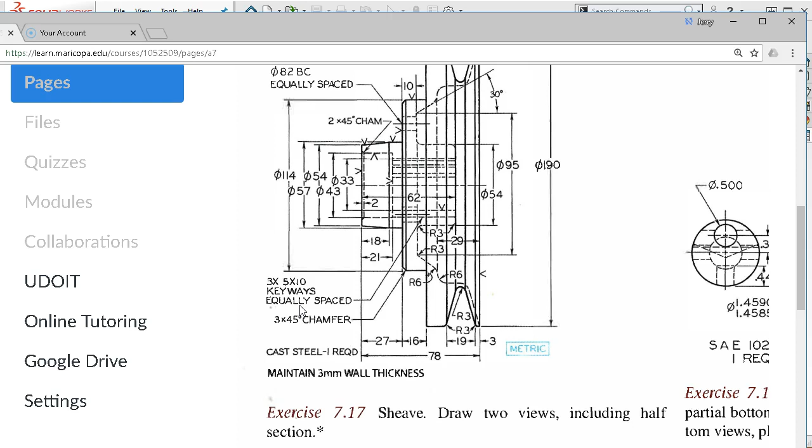So 3 times 5x10 keyways, so 10 by 10 key stock, equally spaced, 10mm holes on an 82 bolt circle, equally spaced with 3 times.

So those don't necessarily have to be clocked. Typically, they don't have to be clocked. In this case, because of the keyways, they may actually have to, may end up having to be clocked because we're getting close to a spline and the positional tolerance. It wouldn't necessarily have to be exact, but if we were putting an 8mm bolt through there, we would have a millimeter either way, so we could look at this from a positional standpoint of do we have to put a tolerance on the keyways to the bolt circle.

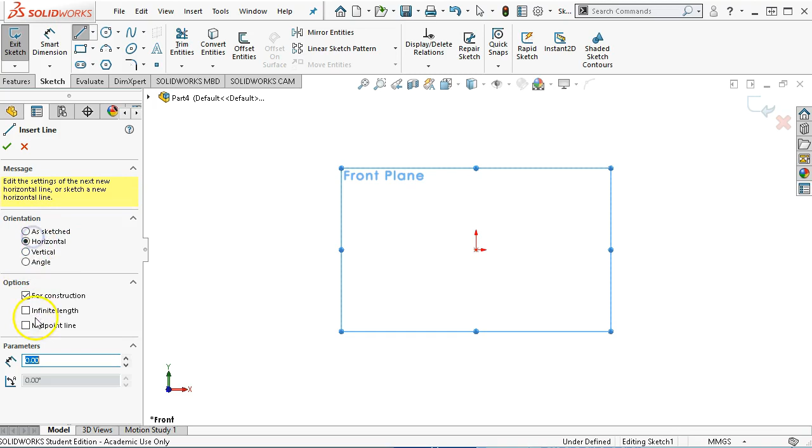All right, so location, let's go ahead and position this out. It is in metric, so new part metric. We're going to go ahead and sketch this in the same orientation on the front plane. So sketch my center line, because this is symmetry or axis of revolution. This is going to be horizontal, infinite length, placing it on the origin.

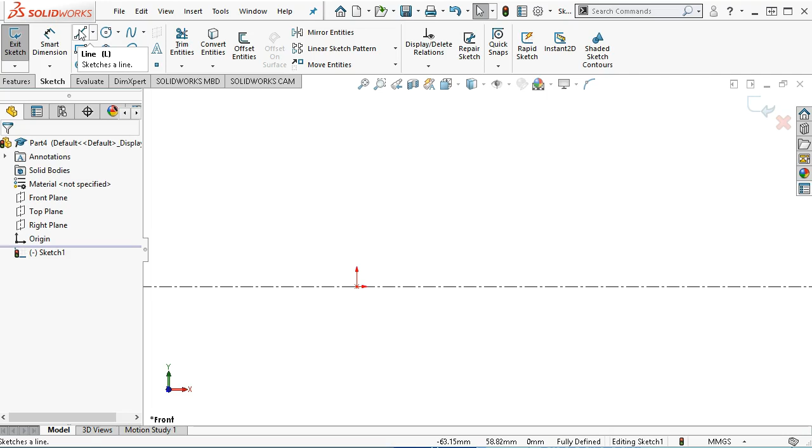The part, the nose of the pulley, the sheave, is going to be on this face. So I guess with the through bores and the lines, yeah, it's not really going to matter. So we will pick the top part, and I'm going to sketch a couple of pieces of geometry to get it started.

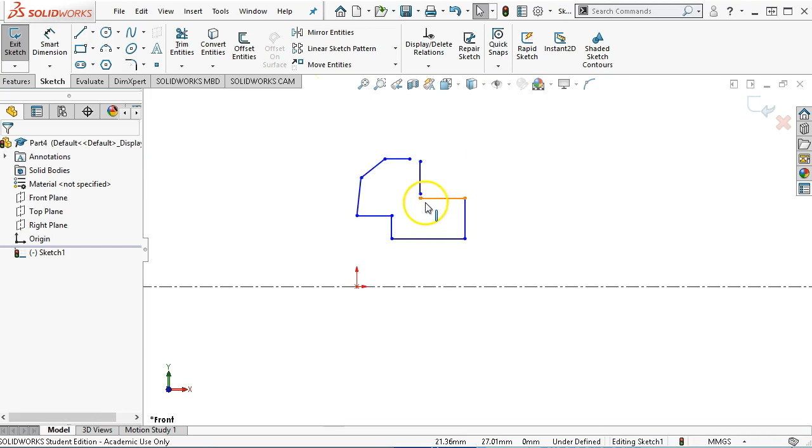And we'll just deal with the hub. So our hub kind of looks like that, maybe not quite like that, but sort of like that, and I missed. So grab the endpoint, drag it to where it's coincident, and that one needs to be vertical. All right, so the end face, that's going to be where I'm going to locate for the origin. So select, control, select, make those coincident.

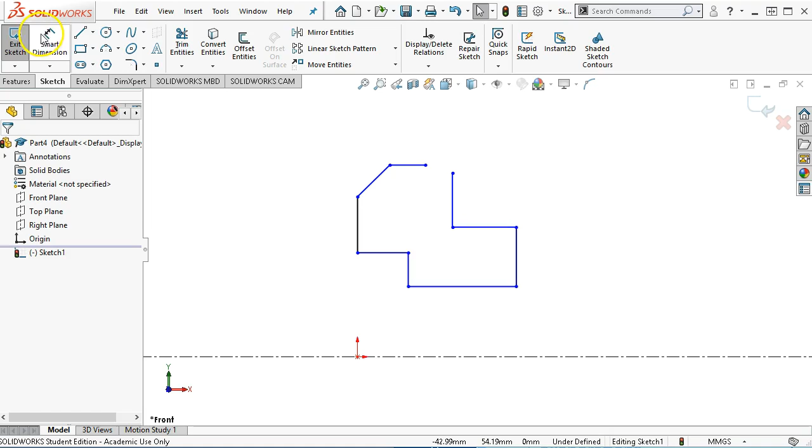And we have a through diameter of 33, so I'm going to get that one out of the way. And once I go into the diameter dimensions, it's going to stay, so 33 and 43. And then the outside of the hub is 54.

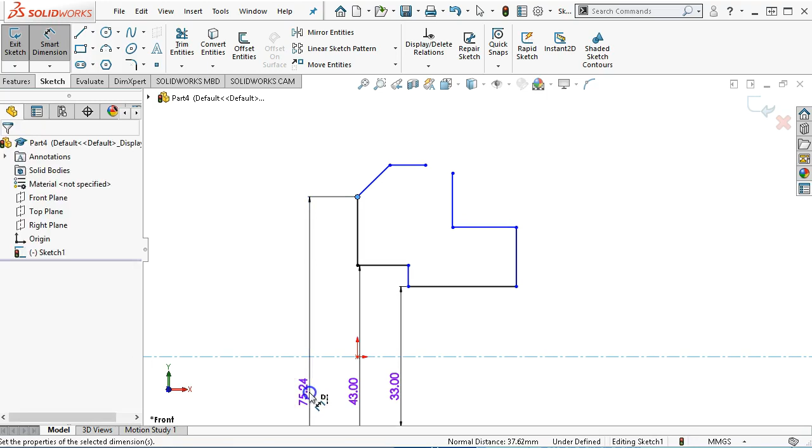All right, I need to expand that out, maybe not that much. Expand that out to where we can see that then it goes from 54 to 57, and that's determining the angle. This is called a cast steel. One thing I noticed is that they put the grind marks on, so this is sitting inside of whatever is turning. They want a nice surface finish on those, but we're not given a surface finish call out, so I'm not going to worry about those right now.

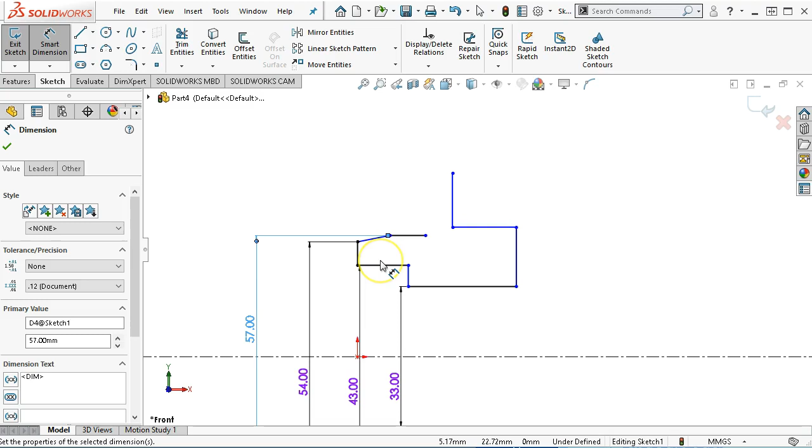So we go back into the diameter, and once I'm in that diameter command, and you see the little D center line, it's going to stay until diameter until I hit escape. All right, so after I pick the first one, place it on the opposite side of the center line, that puts me into the diameter dimensioning or the full dimensioning. Then I can hit escape to get out of it, and we'll start putting in dimensions. So the step is 21. The angle is 18.

See what else we have to work with here. We're not quite past the step. The overall from nose to the back is 62. And then those inside diameters, we're going to go to 54, so we're now in the diameter tool.

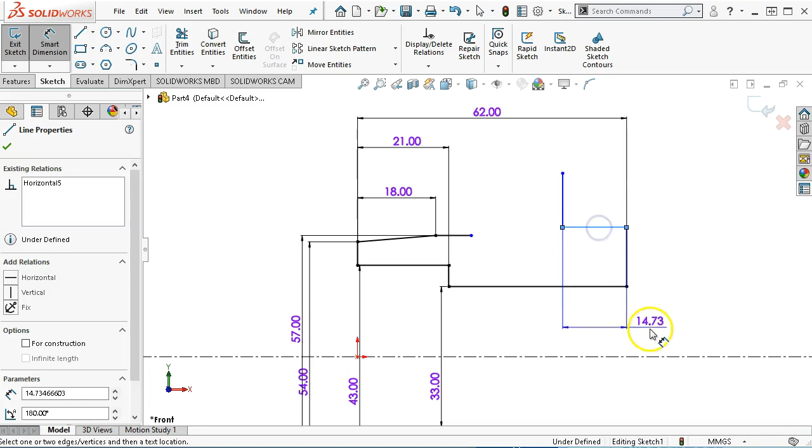So we're going to have to pick the center line again, and then we'll go 54. And from that face then, all right, so we have the 54, but from the back edge to the inside is 29, and we set the 62.

So we're looking for kind of a stack up since this is in effect chain dimensions. So we're going to go over, out. Let's see, there's only the one chamfer, the rest are radiuses. Okay, 2 chamfers, and that one's a 3 millimeter, and then the 2x45.

So where is the second 2 millimeter chamfer in this? I would think it would be on the back side, but maybe not. Okay, so sorry, not 2 times, that is a 2 millimeter by 45 degree chamfer, 3 millimeter by 45 degree chamfer. Okay, that makes sense.

All right, so 62 to that face. We're going to go back up and around. And what is that first step?

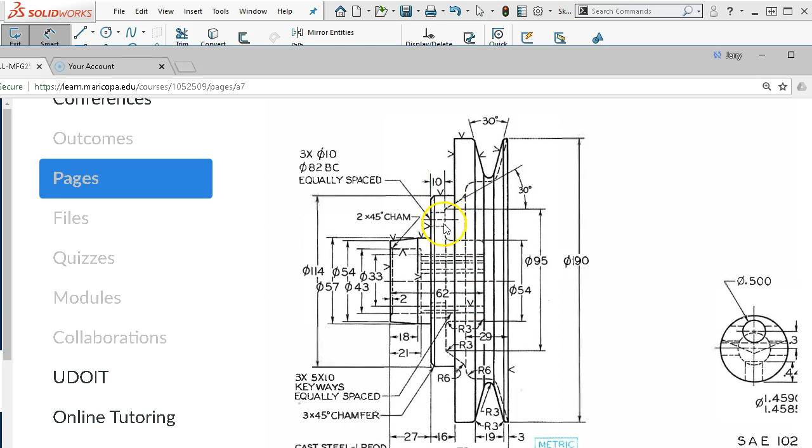And it comes back. Where is my dimension to that step? So we have 19 there. I don't think we're, no. Oh, there it is, 10 millimeters from there back. All right, so it took a little searching to decipher that.

All right, so let's do the next couple of segments. So we'll pull that up a little ways. That's probably not too far off, I think.

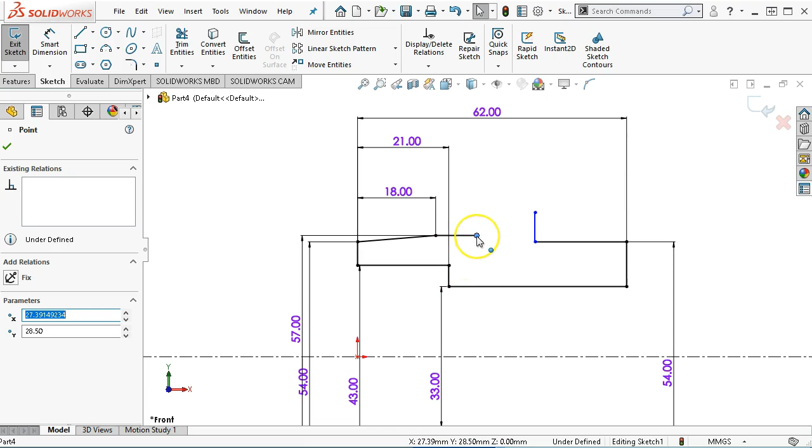Okay, the 21 was the inside step, and the 27. So, all right, so this comes over.

Up, and then it's the outside step. All right, so once we get over here and it comes back down, and this one is at a little bit of an angle and goes this way. All right, so,

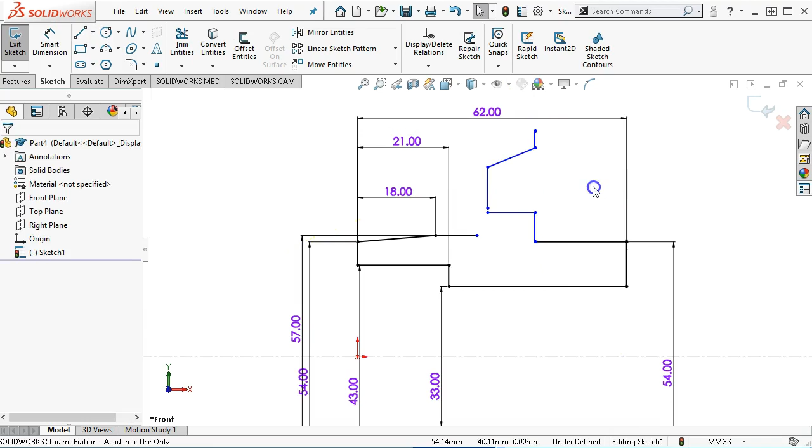And I missed again. So there we go. And then we'll follow it around this way with, oops, missed.

All right, let me get out of that. And whoops, sketch. I was trying to do a thin feature. Got really button happy on that one.

Back into control 1 to the front view. I'll pull that out a little ways. I'm going to go ahead and draw the feature in, or the fillet in, and then we'll call that good for now. All right, so I have enough geometry.

Horizontal. No, oh, it went parallel. All right, so when it gives me the error and I see the parallel, it actually inferred for that line. So that was not the desired result.

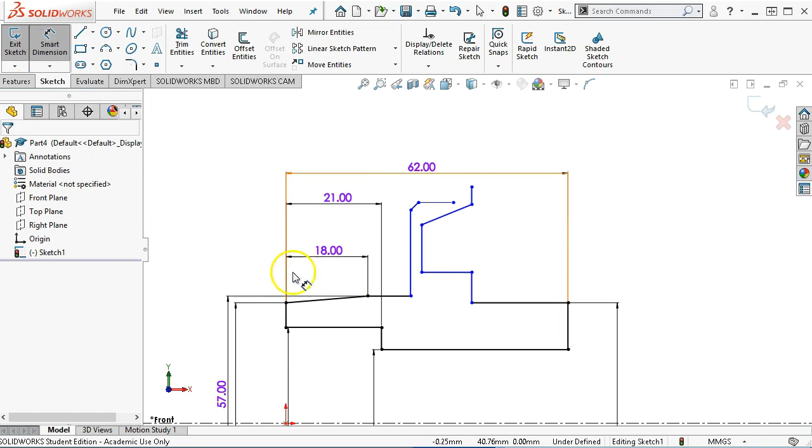All right, so 27 millimeters to the first step, and then 16 millimeters to the next. And I probably could have put that on the next line.

Oh, I got that to go to a center line. So let's uncheck the for construction. So that means these guys are going to come back a little ways.

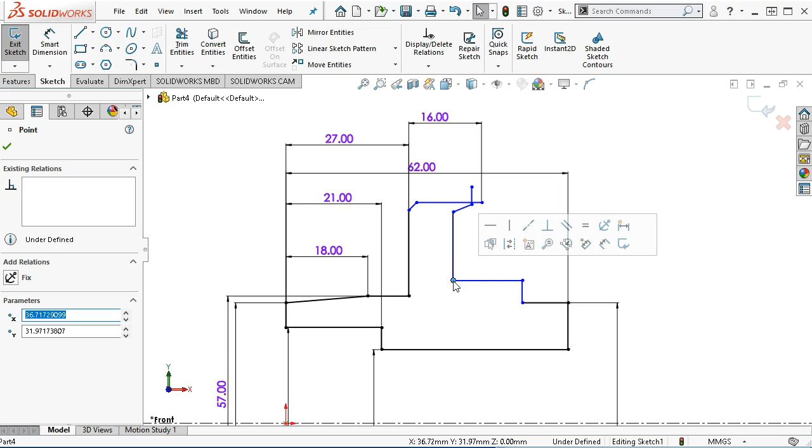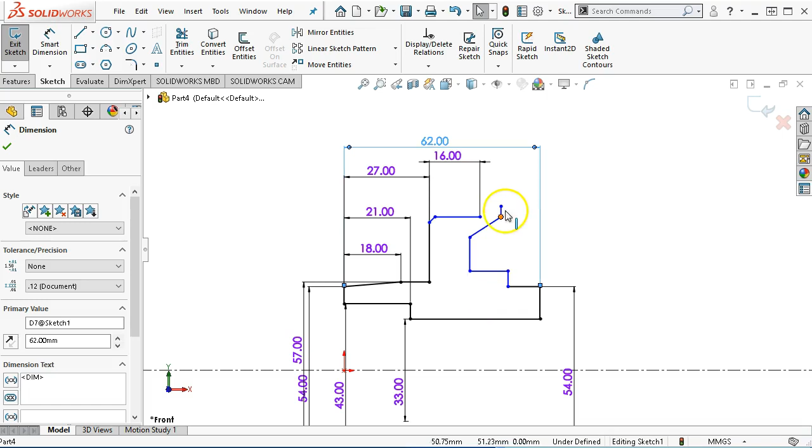All right, so the 29 is to this step. And the overall, well, we haven't quite worked our way around to the overall. All right, so we're going to need that overall.

So we have the blend, and then it goes into a radius, and then it comes back and it goes into the angle, and then it goes that way.

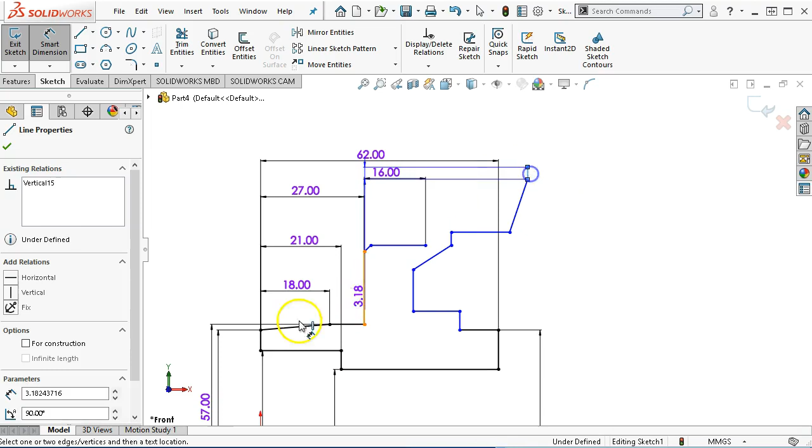Ay, ay, ay. All right, so from that point to that point is 72, or sorry, 78. And then from step to the line is the 29.

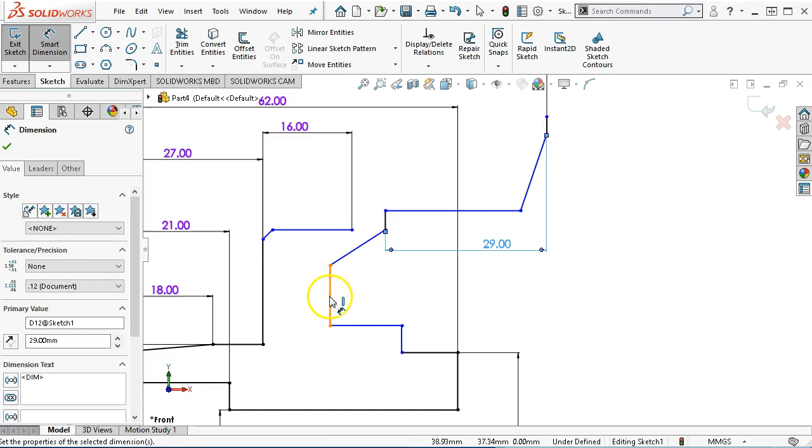And then this one is the 10. Okay, so kind of expecting that to be a little strange.

All right, so to our points, as we're still deciphering this thing, we're 190 on the outside. And since that goes right into a fillet, I'm going to go ahead with the point. 190, so that's quite a bit bigger.

What else am I missing for the diameters? So the outside hub on that 16 millimeter is 114.

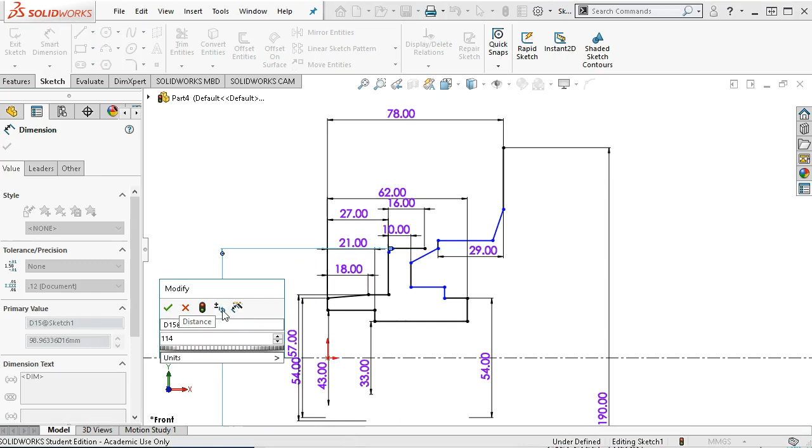I'll kind of leave that one where we can get to it. 114, and we'll come back. So this was 3 millimeters by 45.

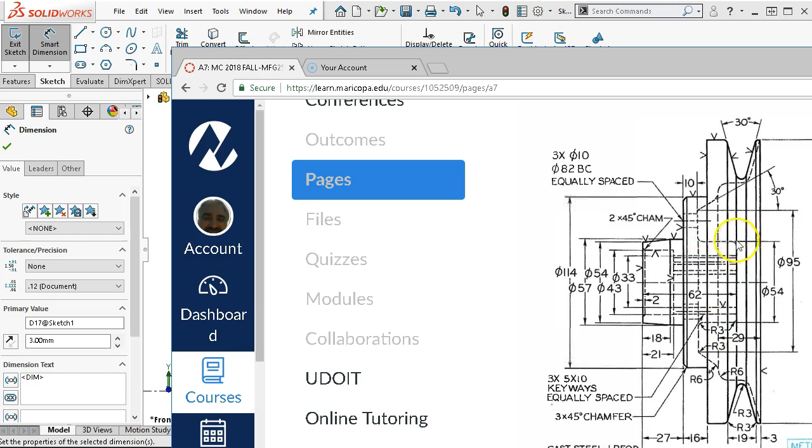Okay, so those are starting to come in. Let's see, what else do we have? The hub, we did at 54. And so let's double check that I did that correctly, because I think I got another step in there.

All right, so deciphering it that way, I was thinking that that step was part of this, but since it's not, we'll delete that segment, and that comes up, and that goes coincident. So that makes the interior hub.

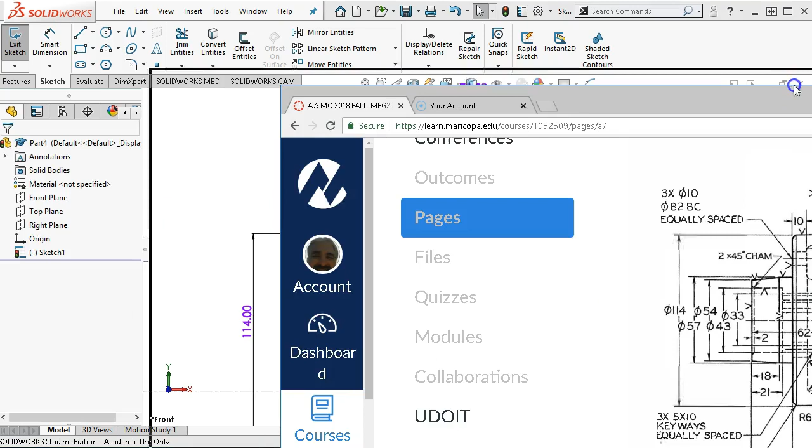Okay, so coming around and over a little bit of an angle on the step. Oh, too much.

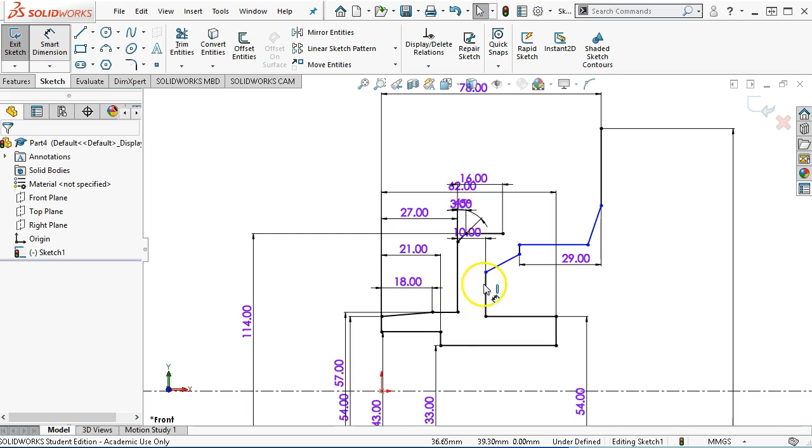All right, so to the point, to that intersection was 95, and I'm not going to worry about any more of the fillets because, well, this just became complicated enough.

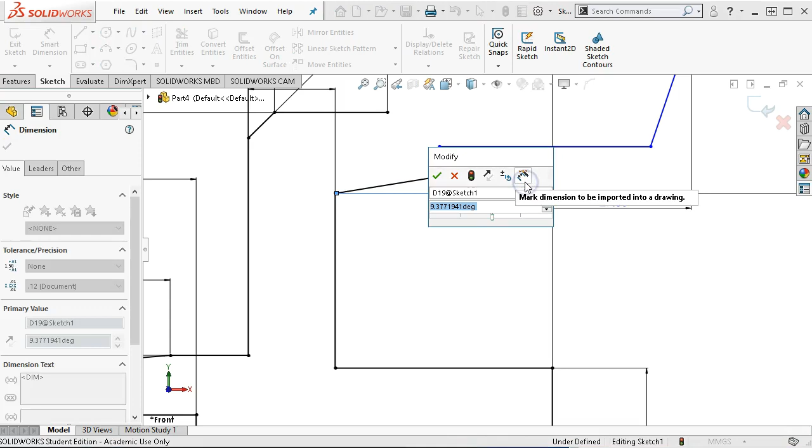The fillets and rounds. We have a 30-degree angle, so here's where we can go the endpoint and the line, and pick the four-headed arrow that goes in that direction, set the 30 degrees.

All right, and then the next step, if that maintains the 3 millimeter wall, then we're going to have to construct the V to get it into position and come up with that angle.

So since that's at 30 degrees, then technically that should be at 30 degrees. And now you know why there are only 3 exercises in this assignment.

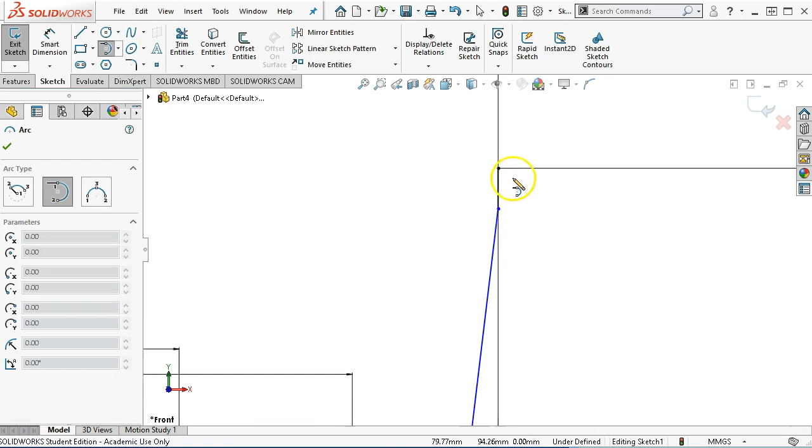So let's go to the tangent arc, and we'll come off of that way. And then we'll select out of it. I'm going to hit L on the keyboard.

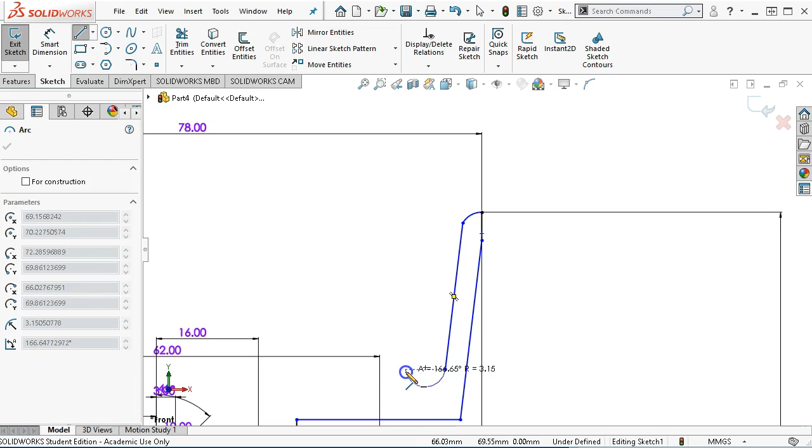And we're going to look for parallel. So I kind of hover over that and it flashes up the parallel. We'll go into a continuous, to the continuous tangent arc and pick up that point.

And that should not be vertical. So that means I'm losing the tangency a little bit. But while I'm here, I'll go ahead and select.

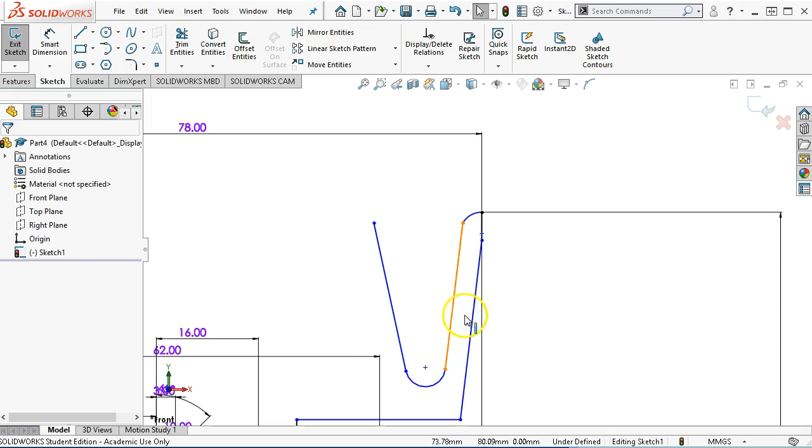All right, and these are going to be symmetrical on the lines. So let's go ahead and put in a 30 degrees. So actually the 30 degree half angle would be 15 degrees.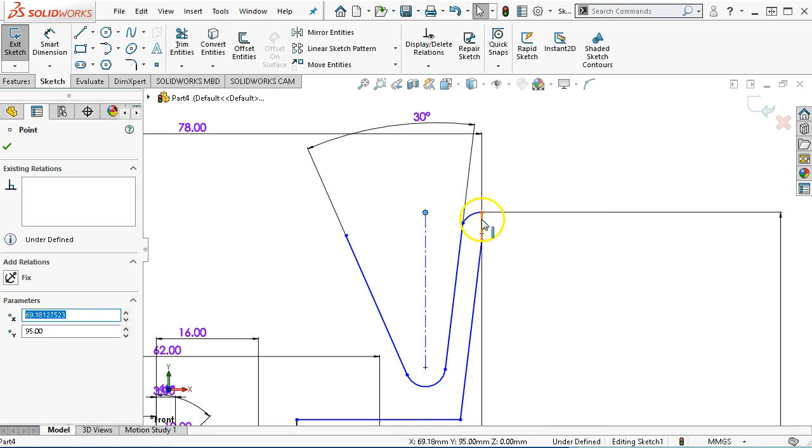So let's just put in a center line. As soon as I put in this second center line, that's going to help me with my symmetry. We're going to make those parallel, and then for length, we'll go with horizontal.

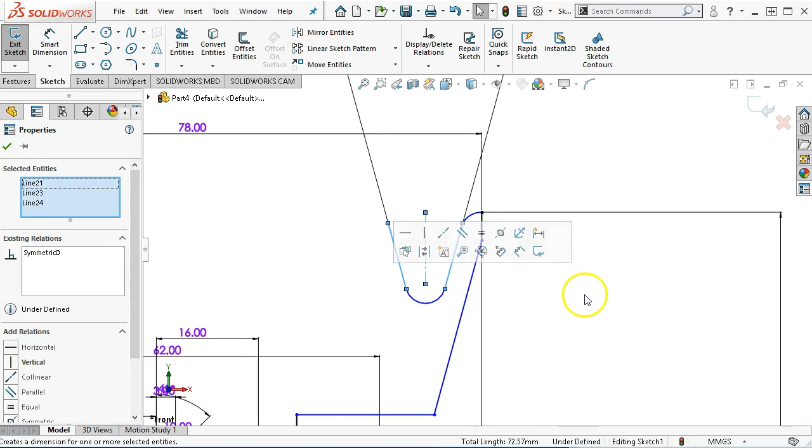Right, and then the lines can become symmetrical. So select, control, select, control, select. Hold that up a little ways. All right, so we have a radius of 3 in the bottom. And since the upper fillet moved a little bit, that tells me I didn't get tangency.

So we'll go back and apply tangency. Actually, since those, well, I don't know that that'll be exactly the same. So we have the tangent arc. I'm going to come off of that. And even though I can't say they'll have the same geometry, they will be equal.

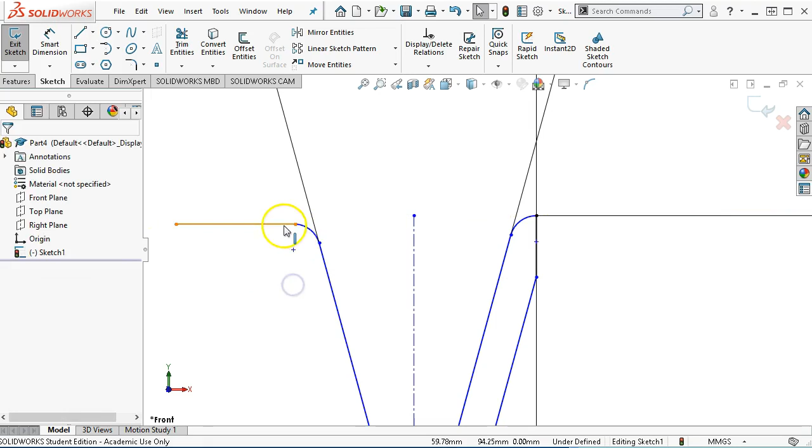And then we'll come off horizontal, and then we're getting a lot of geometry, so we're going to get a lot of inferences. So just be careful when you're placing that line, that you're not inferring something you don't want to. All right, and this is also the same diameter, so we're going to go coincident, selecting the point.

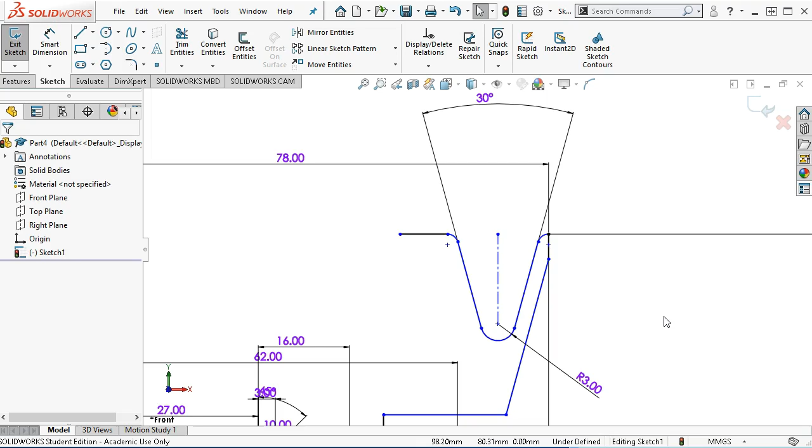All right, radiuses of 3 at the end, so let's just go ahead and make all of those equal.

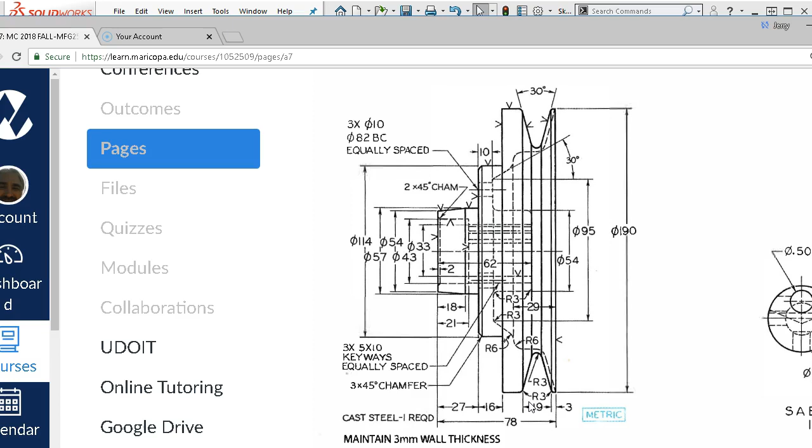Positional, it is 19, and that looks like, I want to say it's 19 to the top of the vertices. Most of the time, since I included those, we're going to need some virtual sharps.

I'm not going to count on it being the lower portions, because I wouldn't call that a good design technique. I can't measure those, and if I'm going to machine this with a form tool, I may plunge it with the 30-degree angle in the nose. I may plunge into that material, and then wouldn't be 100% sure what the position is. But they are going to say the 3 millimeters on the vertical, and then once we apply that...

Well, I think it is dimensioned from those points. But let's talk about a virtual sharp real quick.

If we need to dimension to those points, I'm going to select, control, select the lines, and when I hit point, it's going to put an intersection up here. And that intersection, let's see, will it go with that one? Probably not. All right, so I need the line, and we need either a construction line or something out here. No, is that going to give me a virtual sharp? No, so it's not liking the points.

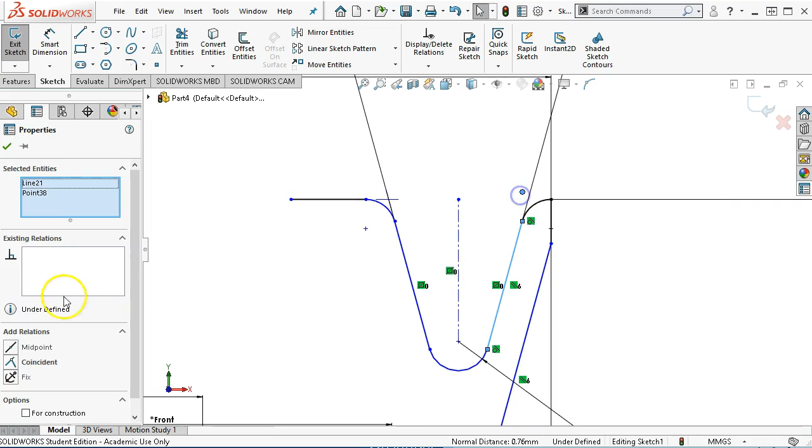So in that case, my virtual sharp, and we set the look of these in the options. So that needs to be coincident, and then that one will be horizontal. So we can, if we can get the virtual sharp, otherwise we'll set the points, and we'll see how close that ends up being. So I'm going to get rid of the virtual sharp, and we'll stay consistent with the points.

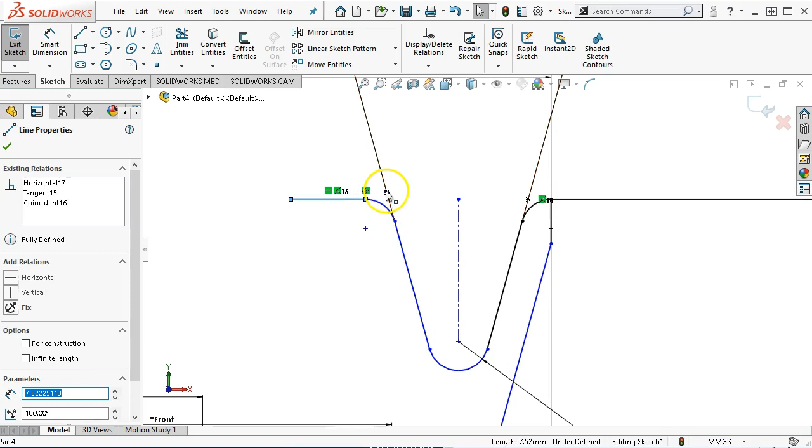But in the drawing, I would probably put these over into the points. All right, so we're going to go. Best guess is to the bottom of the radius, which I don't think is, I don't feel like that's something I can measure.

We want to pick the line, since we're given the 3 millimeter wall thickness. We're going to go to the arc and then accept it, whatever the dimension is. And because we picked on the arc and not the center point, I don't have to do math. I'm going to switch to a min condition, accept the dimension, go back and double click, 3 millimeters, and then that sets the wall.

Okay, so as far as that one, we're also going to maintain 3 millimeters here. So between our parallel lines, then that starts to come together. All right, so 6 millimeters on the interior, 3 millimeters, 3 millimeters. Yeah, we're going to do those as separate fillets. I've already made this complicated enough.

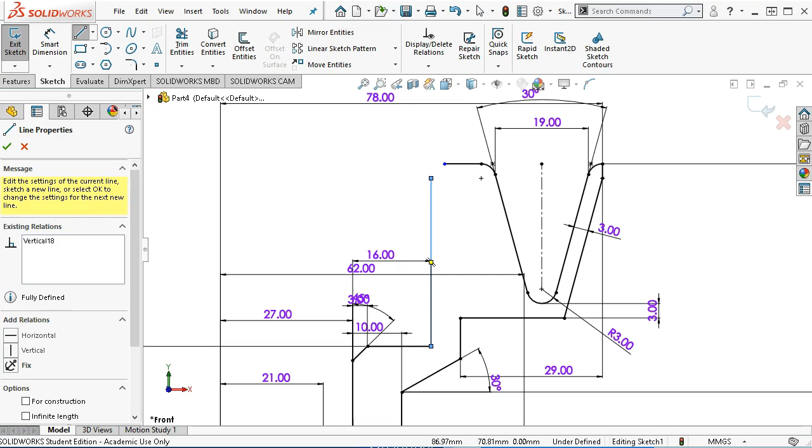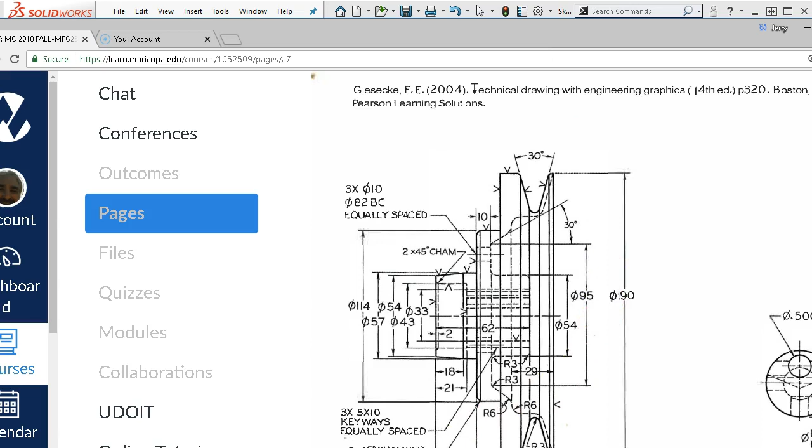All right, now we're at a point where we can connect the endpoints. Actually, there is a fillet on that one. That was... let's see, we put... to the outside, the step. Okay, let's pull that back up and we'll see where, okay, so we have the 2mm by 45 here.

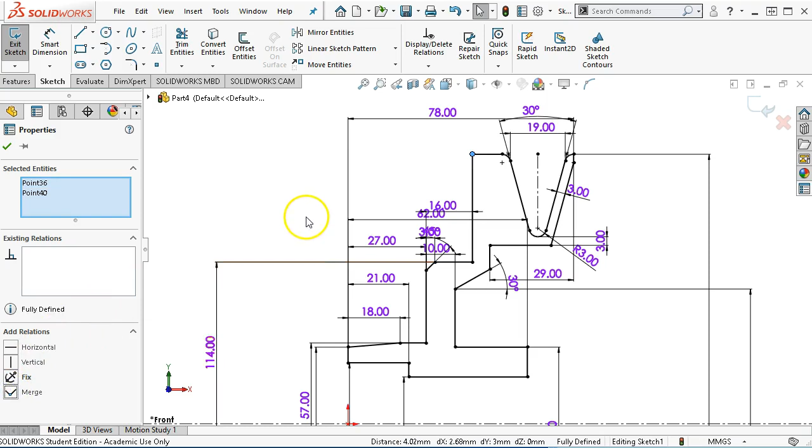And then we come down and then that's a sharp and then that's a sharp. Okay, got it. So I'm going to pull up till I see the inference line. The other thing that we could do is go ahead and select both endpoints and tell it to merge. It has the same net effect. Merge does not produce a relation just like any of the other endpoints.

We have the distance, but those are coincident. We'd either have to trim or split entities to break those out. So I'm tired.

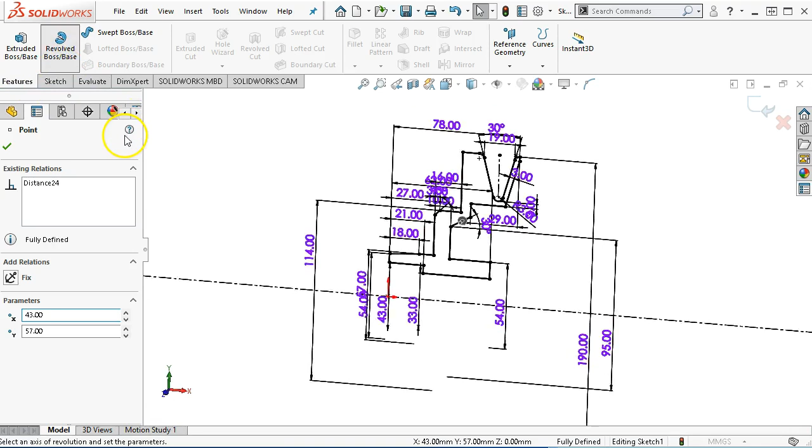Let's go ahead and revolve this and see what we get. So the revolve boss base, it's not going to show me a preview because I put in that second center line. So the axis of revolution that I want to revolve around is that one.

All right, so we have our chamfer was on the interior on that one. I'll include it afterwards. And now we can go pick up the radiuses.

All right, so the internal radiuses are radius of 6, radius of 6. And then the insides are 3s. Oh, the keyways.

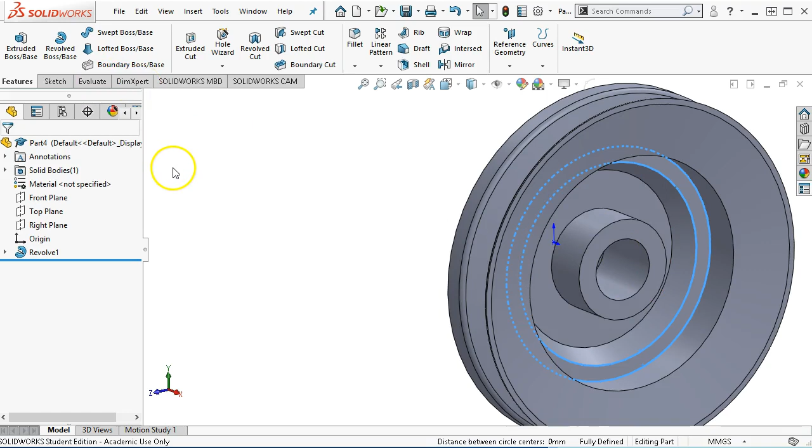Well, let's do the radiuses and fillets last. I want to go ahead and put the keyways in the holes. So let's go ahead and select.

It does not say that the holes and the keyways are clocked to each other. That would be a consideration. It just depends on if the bolting plate is going to, whatever this is bolting to, is part of the shaft and the flange.

All right, so sketch. When we do the keyways, we can go with a center. If we just do the corner, then I'm going to select for the midpoint, make it vertical to the origin. Going to set these equal.

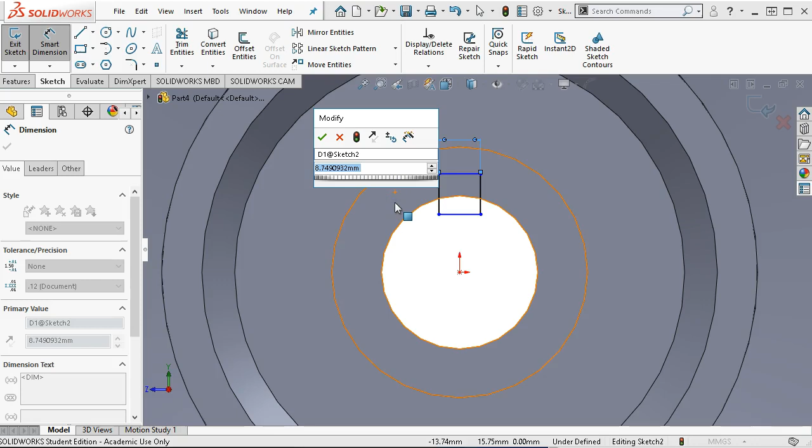It said it was a 5 by 10 keyway. What that does then is I like to see this in terms of the 10 by 10. We could also do it as the 5 by 10 and then pick up, but this also gives me a visual reference of where the keyways intersect.

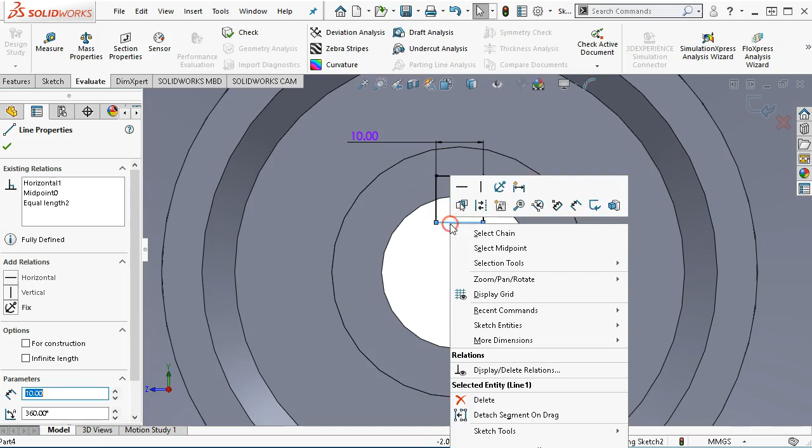All right, so then I'm going to select the midpoint, and the midpoint is coincident with the circle. All right, so that puts the center point just a little bit off, but by the time we do the tolerancing on all of these, we'll be right there. So our objects, I'm going to go ahead and select chain, and we're back in the sketch.

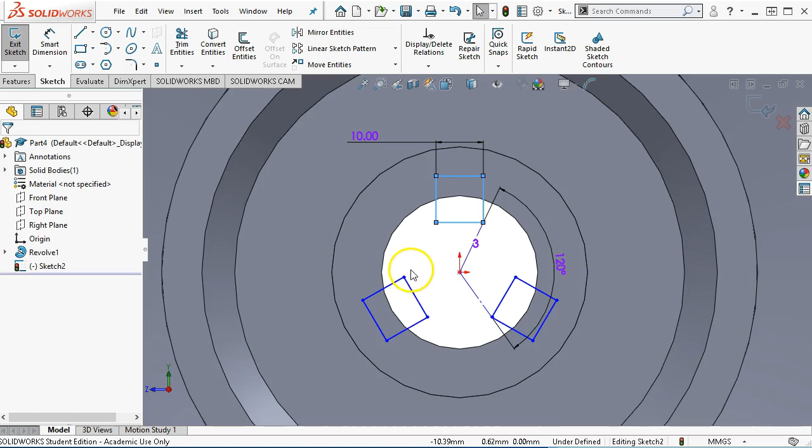We're going to circular sketch pattern. I've not generated any geometry, so we're going to go 3 instances. Let's tell it to go ahead and dimension the angular spacing, and we'll accept. So it's at 120, which is kind of a weird way to pick the corners, but all right.

If I drag off the center point, there's my center and my angular. So if I drag it back to the origin, that should get me fully defined. Linear and circular sketch patterns a lot of the time will require one more drag or placing of a relation or dimension to get it to go fully defined.

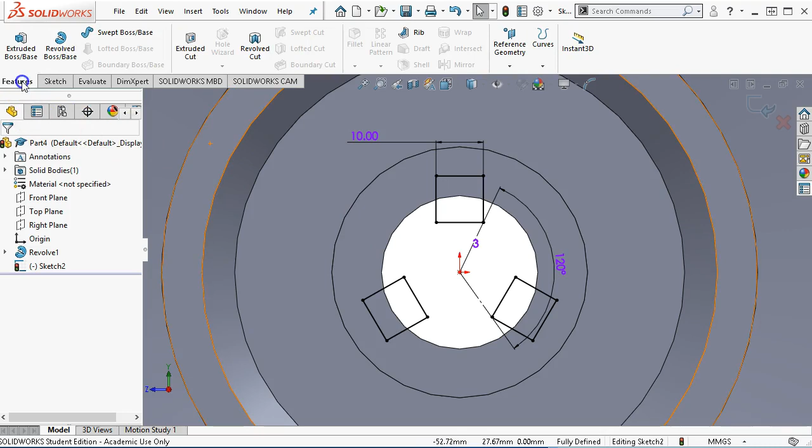So features, extrude cut, we'll go with the through all and accept. All right, so we put those in, and then let's go back to the 3.

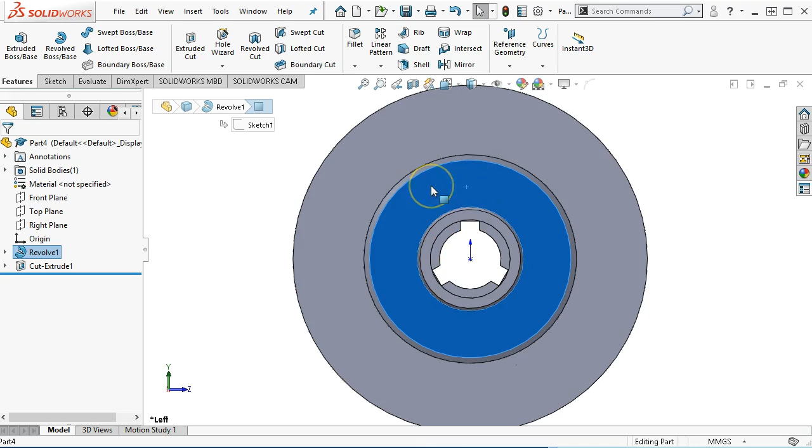If we were going to turn this into a counterbore or had to do anything with the hole wizard, then I'd want to be on this face as opposed to the interior. Pretty sure it's going to bolt from this side. Well, I say that and then I don't know. All right, so if we have to change it, we have to change it.

I do want to use the hole wizard for the geometry, and we're 10 millimeters through.

Oh, I rotated the mouse at just the wrong time there. So drill sizes, and then we're going to, okay, my scroll is jumping around a little bit. We're going to go through all. Maybe I shouldn't use the scroll wheel on this one. There we go, 10 millimeters.

And the position. And it's without the side view. Then we're pretty much guessing anyway, so let's go ahead and place these.

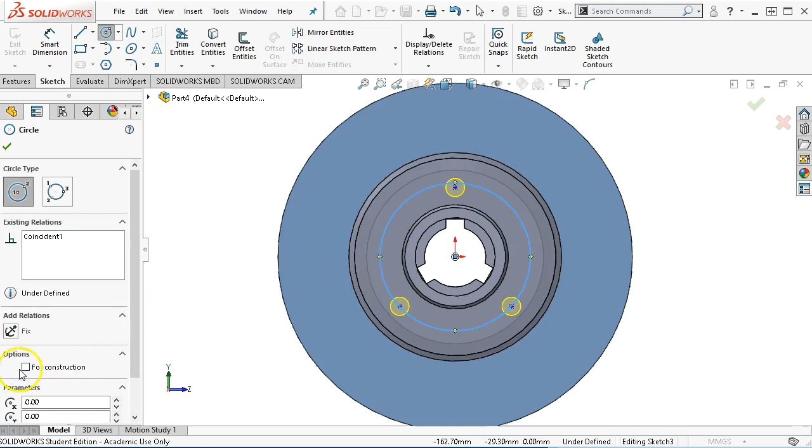I'll generate my bolt circle. And I'll go ahead and make it for construction. The hole wizard doesn't really care if it's for construction, but the other standard cut extrudes do, so just a good habit to leave it as a construction.

And go ahead and make that coincident. I'll drag that one out and it'll find coincidence. So for our smart dimension, I can put in the

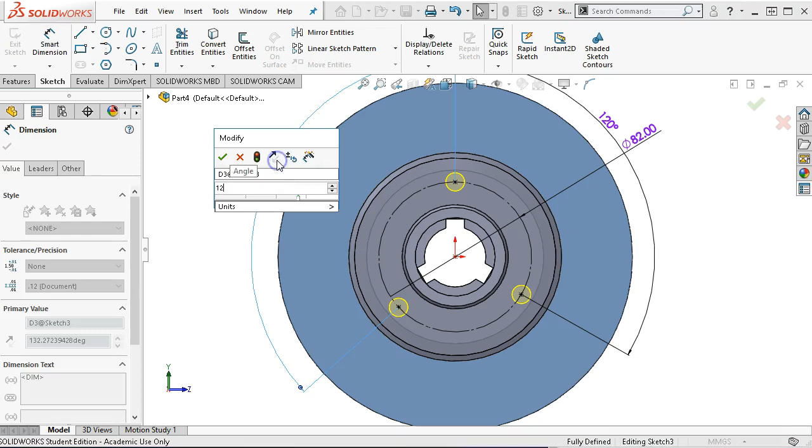construction line and dimension the other points to it, but we have another type of angle dimension where I can pick the vertice, the endpoint, and the endpoint, and we'll tell it that it's 120. And then the vertice, the endpoint, and 120. Okay, we'll go ahead and accept those.

All right, so if I do need to change those to countersink, just like the others, we may end up with an error if I have to change it to the interior. Well, don't think we're going to change it to the interior if it's that close to the angle.

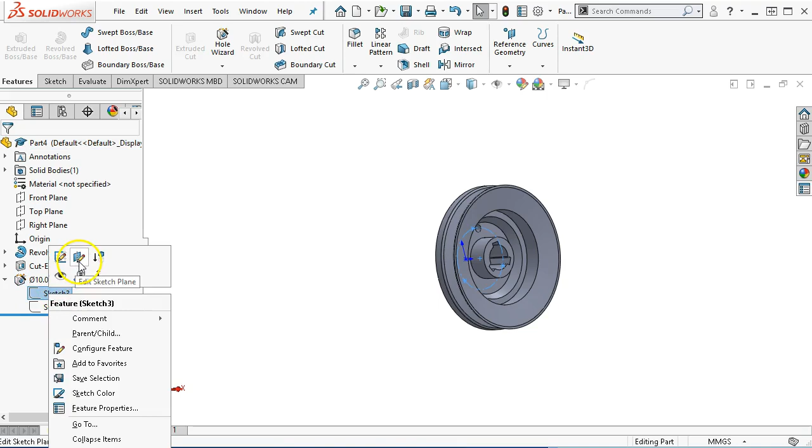So whatever is going through is coming through from this side, and it's bolting into the flange or the mating flange there. So if I needed to change it, though, I would edit sketch 3 and change the sketch plane to the interior, and then we could put our counterbores or countersinks on the other side.

All right, so whatever the stack up is, we're still in question, and I may have, based on the definition, I may have clocked it anyway. But if I do need to change, and it's giving me the warning, so let's go ahead and save the document. This is

7-17, or 7.17, the sheave, and my initials.

Oh, we're in assignment 7 now, so we'll go up one, new folder, and save.

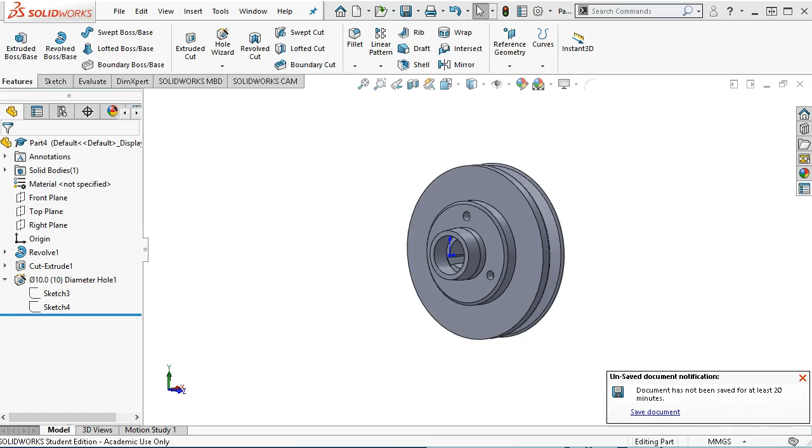All right, so that leaves the chamfers and the fillets. While we're looking at this side, let's go ahead and put the chamfer on. This one was 2 millimeters by 45 degrees, so I can double click in the box. 2 millimeters, don't know why it's giving me 8 decimal places, but it is.

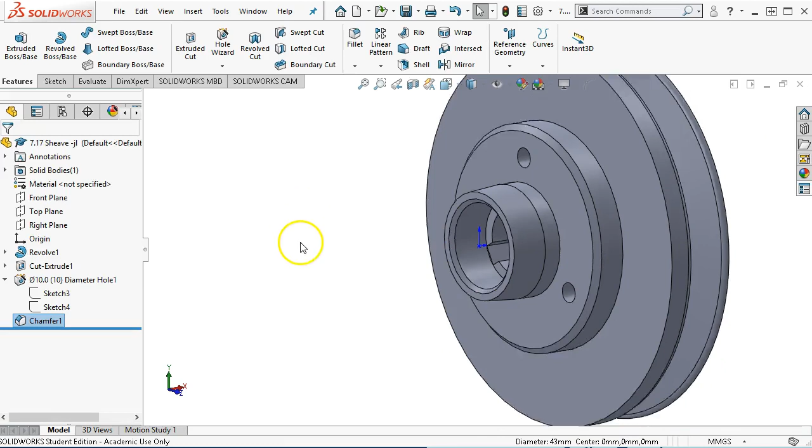We said that these two are 6 millimeter. So if I click on the face, we're going to try it this time. Preference is to pick four edges, but we will see what it looks like. Double clicking in the box, 6 millimeters, and we'll see what kind of blend we get.

That's a little bit close. So FilletXpert pops up and says it has to do a little deciphering there. Since it's a radius into a radius, it may end up being 2 fillets, or we'll have to go back and find the blend. So it is to the flat and then a little bit of a blend.

Since I added the holes, I do not want the holes to be filleted, so this one now goes edge to edge and fillet of 3 millimeters. And then where it goes through the holes, that really looks just too crazy close, but we'll give it an okay, and it's going to find the blend there.

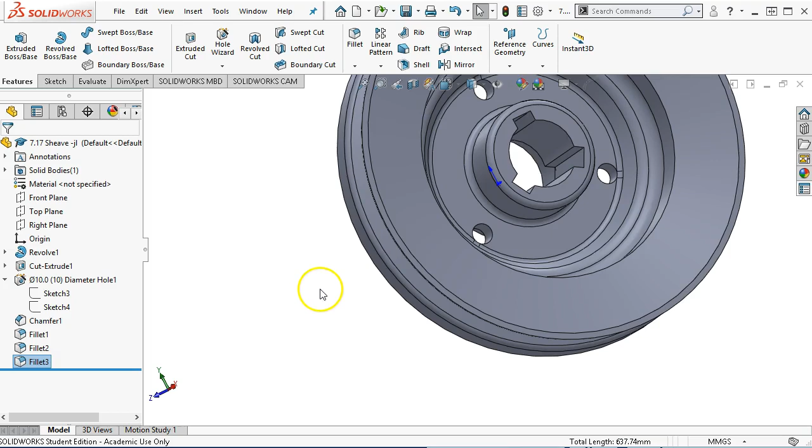So maybe there's something that's locating, but those are those are concerns.

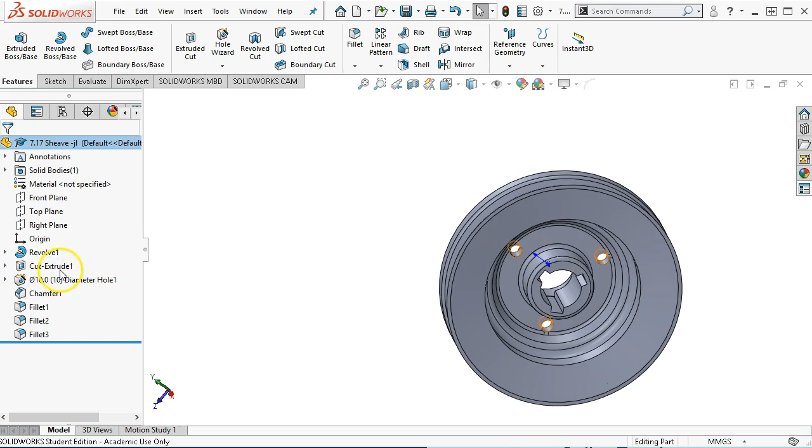So my questions for the design review to highlight, since it's all 3 features, let's see if we can do that as the cut extrude. So when I go into the appearance, we're just going to select the feature. The body would still be everything. I'll highlight that, and then appearance for the whole.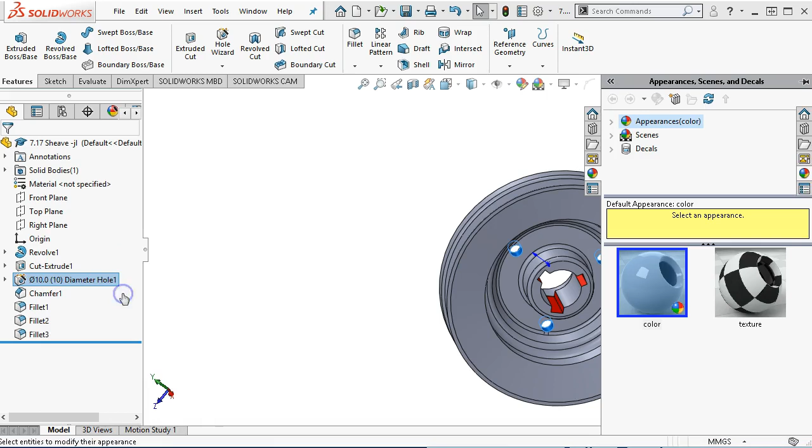Let it catch up here. Again, for the feature, first is the hole locations. Are they too close to the edge? Do we need to look at the mating part? And then, does it need to be clocked to the keyways?

All right, so we'll go ahead and save one more time. Let's take this into an Assignment 7 drawing.

Since I didn't say it first last time, I'll say it first this time: the drawings are still optional. These are for your reference. And since this one is, now they're going to switch back and forth, so I'm not concerned about the inch and millimeters at this point. We would have to decide ultimately, but...

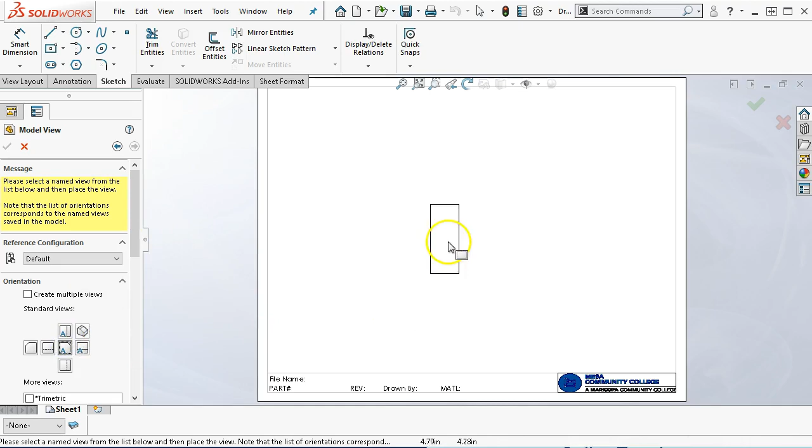The main thing here is just to show the section views and being able to manipulate this geometry, being able to recognize it. If you're going to be focusing on drafting and detailing, then take the few minutes to go through and build these out with the drawings. All right, so I'll go with the front view, which is what we cut.

And looking at that, I'm probably going to need what would be the back view. So let's go ahead and create those. In fact, I haven't been using the feature palette or the drawing palette, so let's pick the view palette. It'll show me the previews.

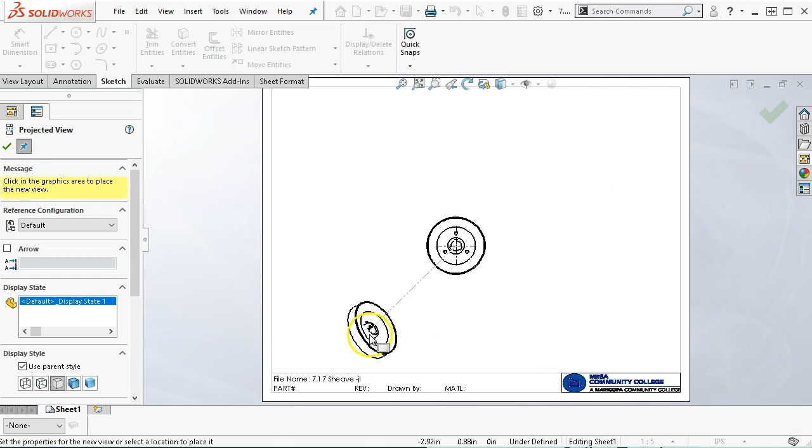I'm not going to pull as much geometry off of the front view as I am the right view. So I don't really like that as the isometric view. Well, that one's not doing anything. All right, so we have some weird isometric views. Oh, it's showing it as the back too, so that makes sense. Let's change it. So even after I've selected the view palette, I can switch it.

All right, I'm happy with the front view. That's going to be the center mark, oh, and since I didn't save this to save my layers to the sheet format, I'll have to recreate them. So let's take care of that real quick.

I'm going to open up a new one real quick. All right, so with the new sheet, we don't want to insert anything. We're going to, oh well, there's the layer there. Why didn't that show up on the other one? Oh, we turned it on. Okay, get back into the mix. We turned the toolbar on, but we didn't actually add anything and keep it there.

So, new. I'll go with the dims, whatever you decide to call it, just call it that on everything. So we'll set the color, and then we need a new one, I'm going to call it the center.

And then, oh, this one was kind of the magenta looking, and then we'll hit OK. I'm pretty sure it just goes for the document template. It's not going to be for the sheet format, so let's go with drawing templates. We'll have it navigate to the A size and save, and yes, replace it.

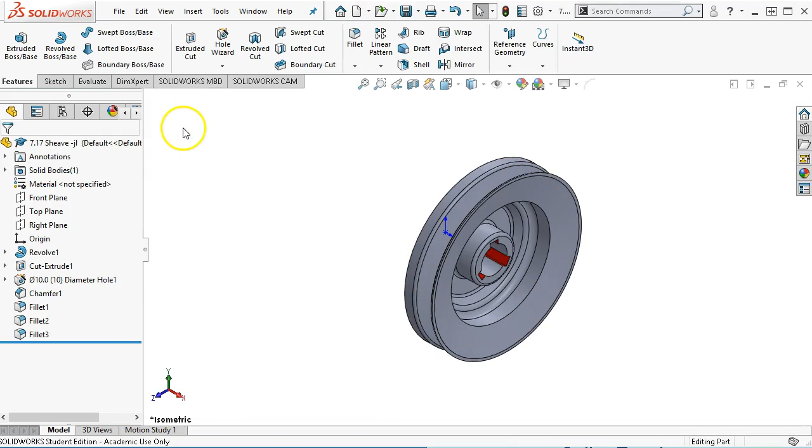All right, and so we still didn't get this one. Well, let's go ahead and kick that out. I want to double check it, so you can go ahead and fairly easily just build those two, but they're center.

So unfortunately I saved it with the center, which may not be a bad thing since when we insert the parts, they come in first on center.

All right, so we actually drew on the right plane, so the left is going to, I think it was the one that we wanted. It comes in with the center mark. And then I'm going to switch over to dimensions, because pretty much everything else will be for dimensions.

Didn't really like the isometric view on that one, but we can go up to the view layout, pick our projected view. All right, that looks pretty good.

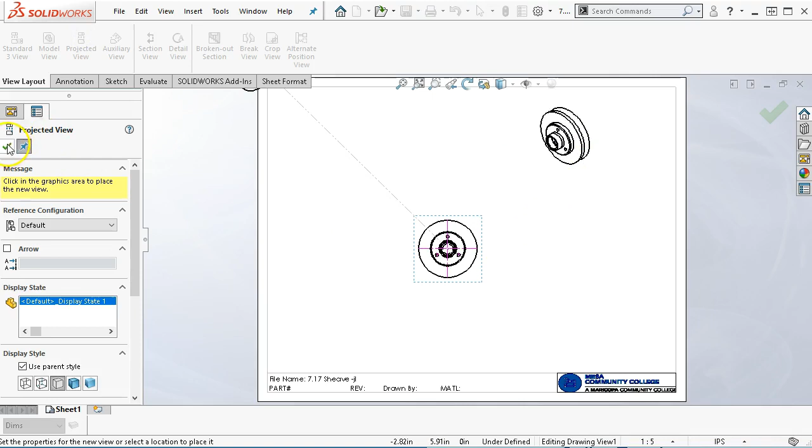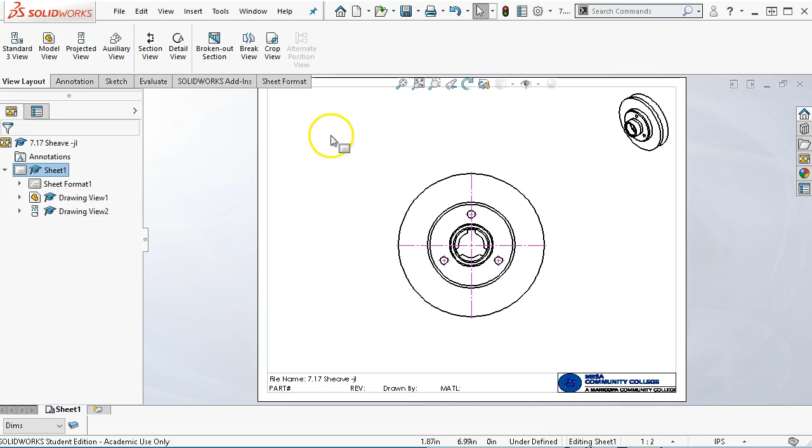Let's set it a little bit bigger, so 1:1. Okay, way too big. Half. And then we'll switch over to custom scale. That one can go back to 1:5. And there again, the half scale may be a little bit big, but since we're on the sides, we're not going to worry about it too much.

So section view, we want to see what this thing looks like going down through the middle. All right, so the first one will just be, and we're not doing any alignment, so we'll bring it out to the side.

All right, and based on folding that up, I don't like the direction, so if I double click on the A, I think it's double click on the A. There it goes, and then rebuild. That'll make it to where it folds up.

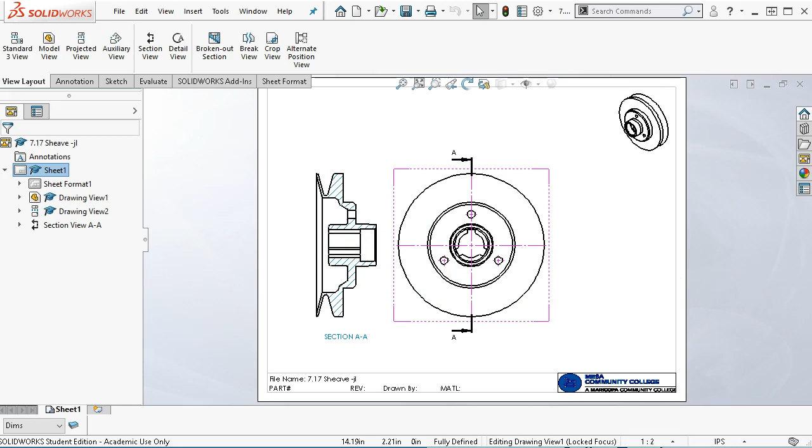All right, and then it automatically puts the hatch in, the cross hatch for the pieces, and then this is a little confusing. It's kind of hard to tell if that's what the intent of the drawing was, that the keyways were going through. This one went through, so that's why it's still a question.

All right, and then if we wanted an aligned view, we go into section view, and then we're going to hover over these, so that would be a horizontal. That one is an auxiliary view, so if we came in at some angle.

And then the aligned view, we're going to pick the first one, set its angle, so that's vertical, and then I can bring the other one over, and we'll see if we can get coincident to the hole location, and accept it. Now that kind of cleans up the interior geometry, and we see the two holes going through for B.

So let's see, if we reverse B, that'll make it fold up a little bit better. Am I still in the command? No.

All right, let's highlight. All right, so if I can't flip it that way, we can always select the view and come over to our view, reference, and the arrow. Oh, so the arrow directions, if we want it pointed to.

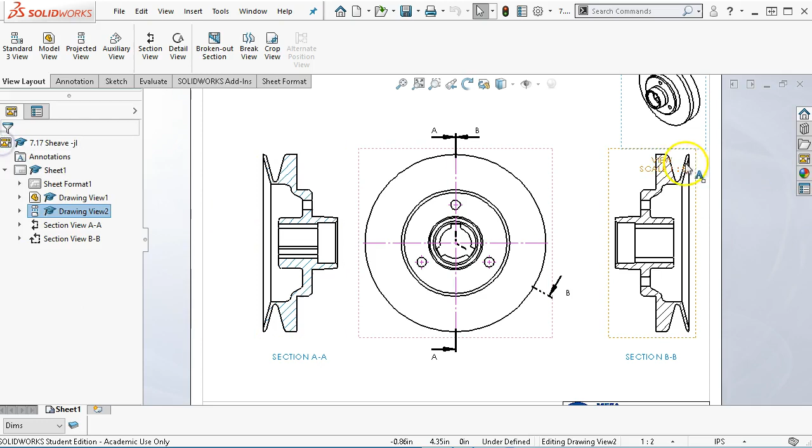I was thinking that there was a way to reverse it over on the profile. So view scale, oh, that's for the isometric. We're just overlapping a little bit.

All right, so that gives us the start. If I pick a cylindrical, then on the annotations we can put in a center line.

And, oh, well, let's just select the view. Okay, so that puts in that one. Since I already changed over to dim, it puts it in as dims, so we'll switch that over to center. Okay, so that looks a little better.

And we can do that again if it's highlighted. Select view. Places it. That one has a few more. Oh, I missed that one. And then we'll switch those over to center lines.

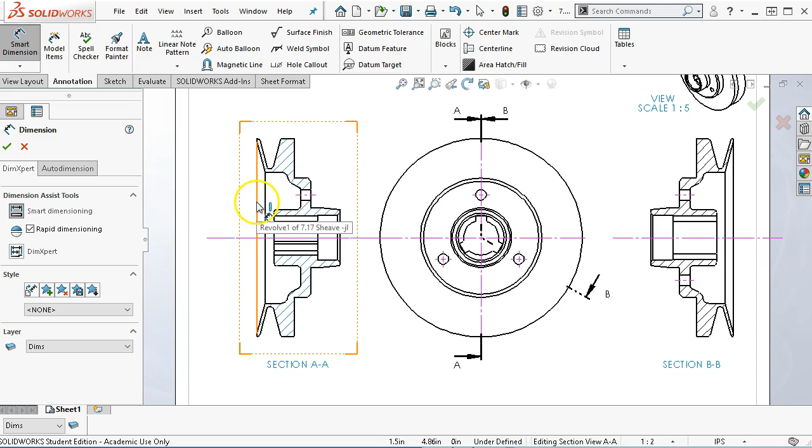All right, so then from there we can put in our dimensions. So pretty much to the outside.

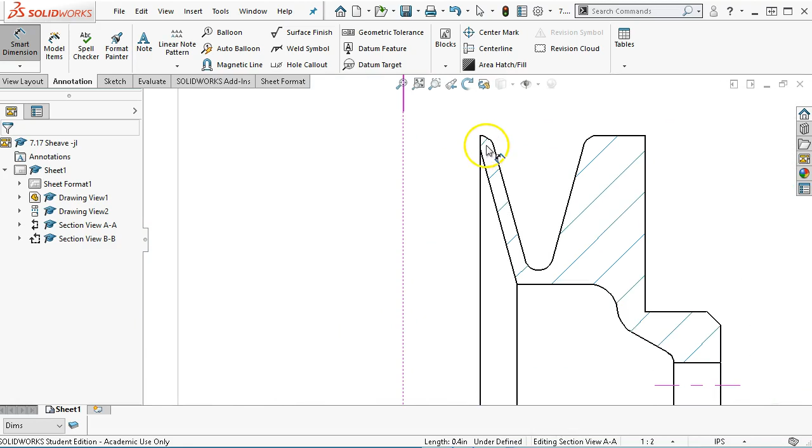All right, so since that didn't go to diameter, let's try, see if it's going to let me do it on the section view. All right, so we just pick across. So center line's not the same functionality as what we were doing when we're creating the sketches.

So it is pretty good size. Probably need to shrink the center line a little bit.

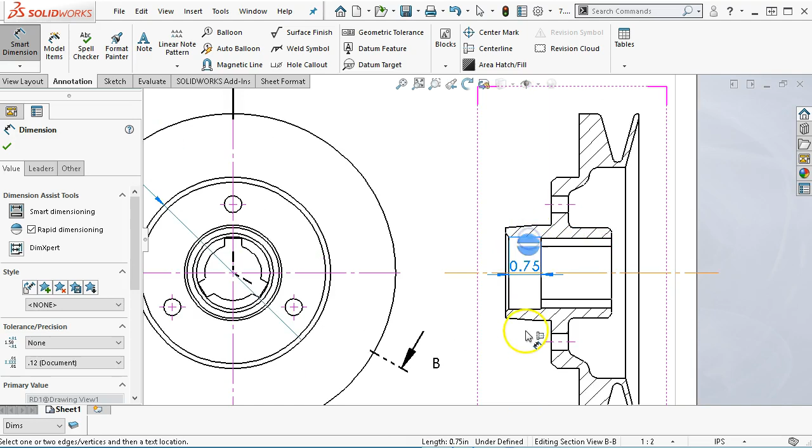All right, and then we'll just put a few dimensions on for reference and go ahead and save this. And notice that it reverts back to the location, so we need to...

Find my library and assignment 7, and we'll just make this Assign7 in case we want to do a couple more. All right, call that good.